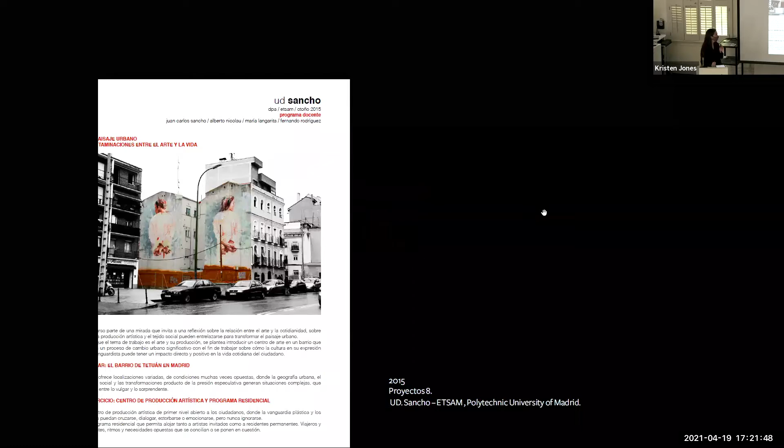That made me think that in my last year of design studio with Professor Sancho in Madrid, we had to do a project of mixed use of market, artistic production, and housing. As in many cases in the school, the surfaces were given, and we had to do the first approach of proposing different types of organization for the program. So I thought it was a great opportunity to think about my personal experience and different social schemes where I could see these three uses in different ways.

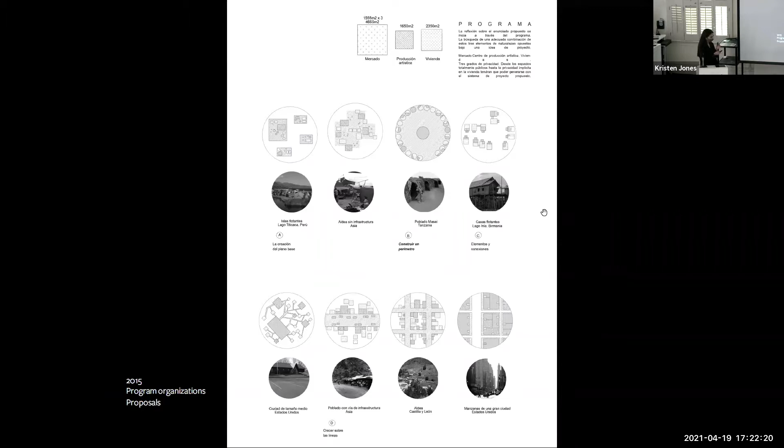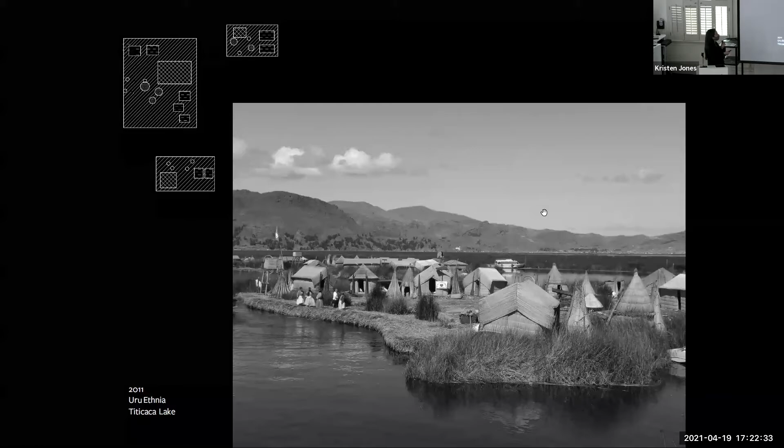I had in mind when I visited the Uru ethnia in the Titicaca Lake in Peru, and they have these schemes of floating islands where they can make different constructions. Or when I visited the Bosque Manos in Tanzania, and they have a longitudinal scheme where the main spaces for cultural events are on one side and the housing units on the other. And especially I had in mind the Maasai culture, for whom production is really important - they keep all the sheep and livestock in the middle of a circular scheme, leaving the perimeter for housing units to protect it. That is a really different approach.

So the next year, I had the chance to do my first research project called Habitat, spatial diagrams from primitive architecture, and it had 3 parts. The first one was learning about the principles, factors, and elements of primitive culture and architecture.

The second part was an analysis of different case studies. And the third was my reading, my transversal reading between all the case studies and different spatial composition thoughts that I had about it.

To make the selection of which communities I should study, I used main theorists like Amos Rapoport, Guidoni, or Paul Oliver, among others, to see which had more information. I could make sheets comparing the social factors, the spatial factors, the physical factors, and how the settlement and constructions were made at all scales.

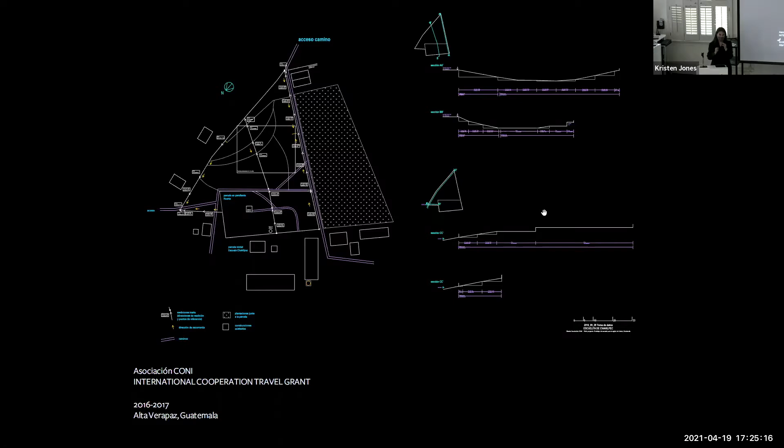So there are communities situated in Alta Verapaz, a department in the middle north of the country. It is divided by a high line of mountains, and has a social and economic condition that's really specific because they don't have many economic resources. It's a really poor area.

At the same time, 80% of the population are indigenous, they are Q'eqchi'. So these were the communities I was working with, and they have this Maya tradition really present, but at the same time you can clearly see the integration with elements taken from global culture.

So on my way back I proposed Nimakmu, and I wanted to focus on 2 things that were important to me. One was the way of living, which was agriculture. Their way of life is settled through the year by the crops.

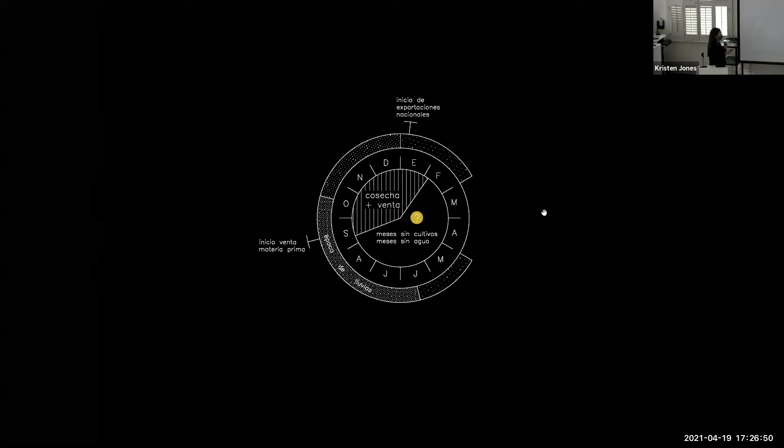Whenever they have to do all the work for the crops, they have work. And whenever there is no rain and no crops, it's a really tough time for them. The main crops are coffee and cardamom, that's what they sell to live.

The other problem that was quite important for me, because I come from Madrid so I was used to working in a dense city, is the dispersion present in indigenous communities, especially this one, where they say they don't have communal spaces to organize themselves. So these 2 points were really important for me.

I had in mind this work I had done about other communities, and I learned how the Piaroa, for example, make huge constructions. They also work in agriculture, but they have a really good way of organizing the community because they have these big spaces.

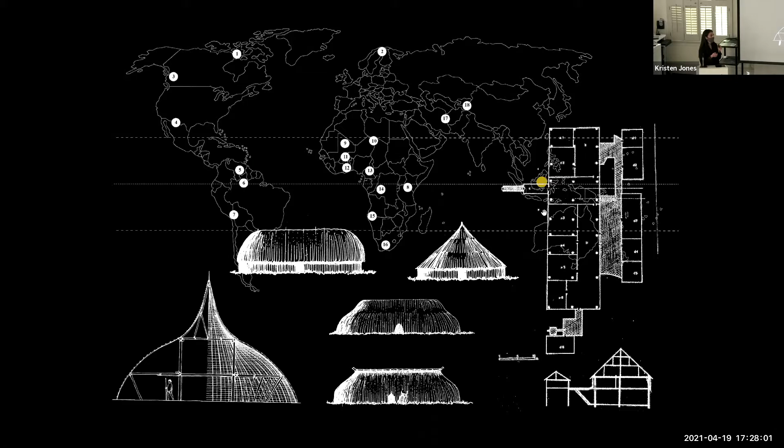Also the Indian people in the Amazon forest make the malocas, which is also a big construction, and they live and work in there. And especially the Dayaks in Borneo Island, whose name means like long house town.

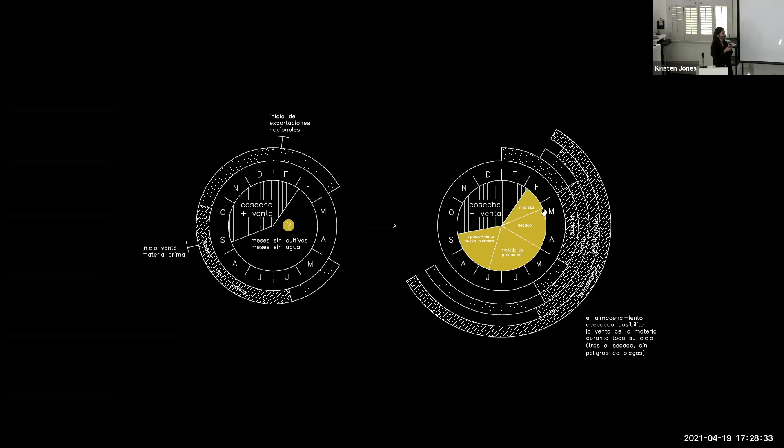Like a huge town, the whole town where they live and work and organize themselves. That's why I wanted to propose Nimakmu, a small factory so they can make their processes, but at the same time also a town hall or community center, trying to encourage them not only to reinforce their capacity as a community, but also to change the work they were doing, being able to work on their crops.

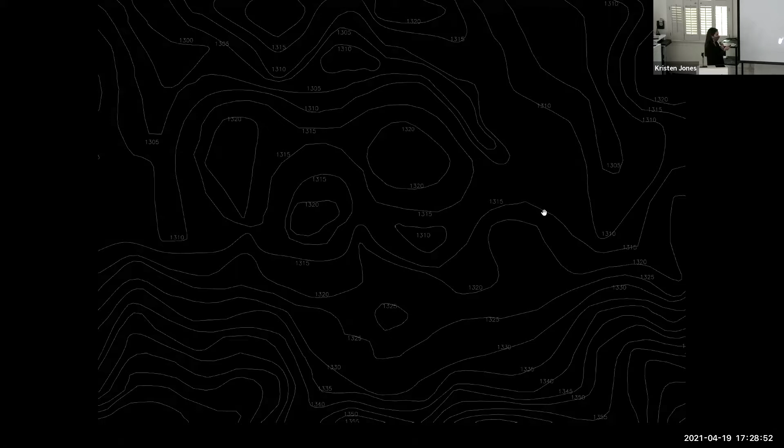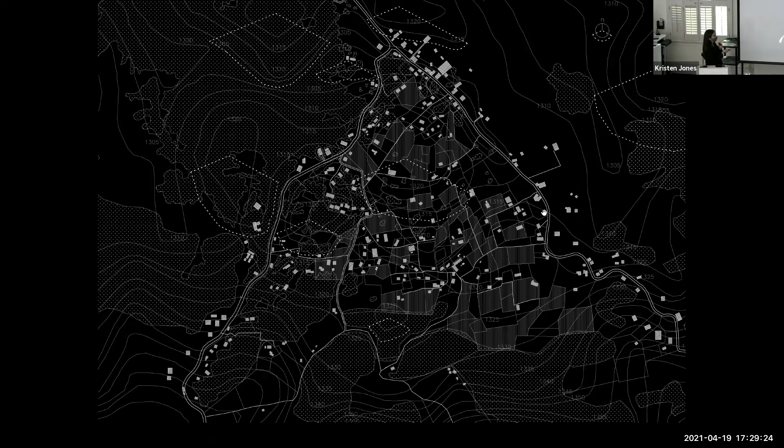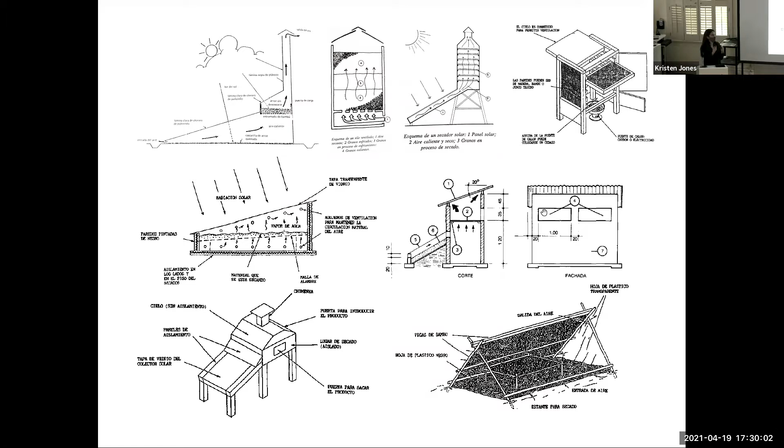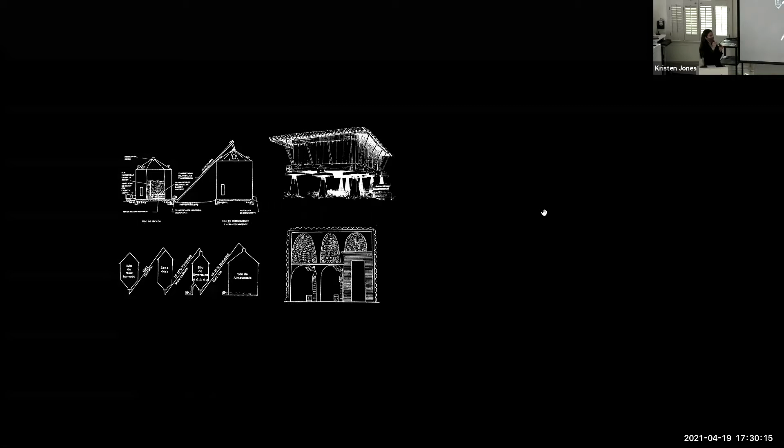It was also a great opportunity to learn architecture, not only from croquis or architectural books as we always do. I made several trips to the library of the agronomous school of engineering, close to the architecture school, trying to learn from the FAO systems of sustainable ways of working with coffee and cardamom without needing electricity or big industrial infrastructure. My conclusions were about how to move the crops through the processes, how to keep them in a dry space without touching the ground so they stay in good condition, how to integrate this solar system, and also the importance of outside spaces because of the weather.

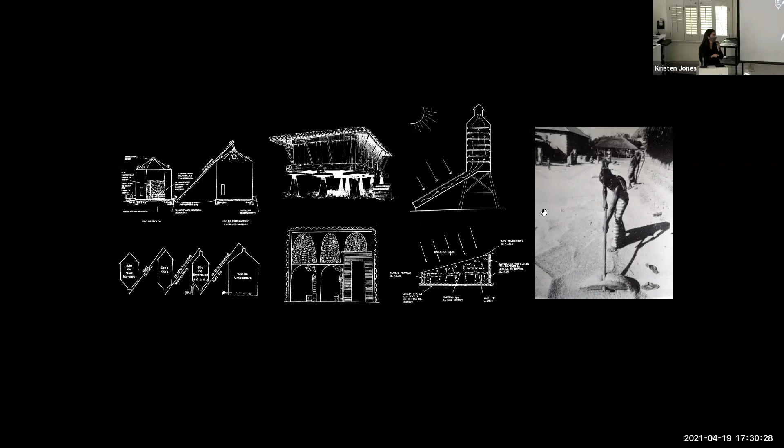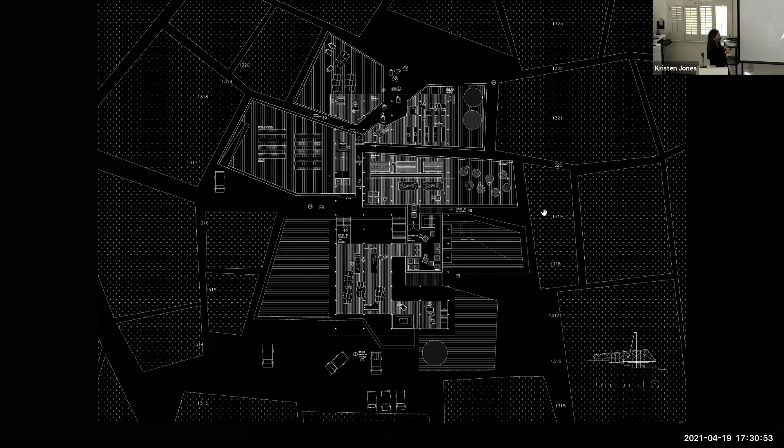So my starting point, as I said, was the placement, and I wanted to work with the crop pattern — also the placement, the way of situating the chimney, and trying to integrate one more roof as they do in the community, using the orthogonal pattern to arrive at this complex where they can work and live together. This other grid from the crops also allowed me to have spaces for arrival and some little plazas connected to the only road where cars can get into the community to transport the products.

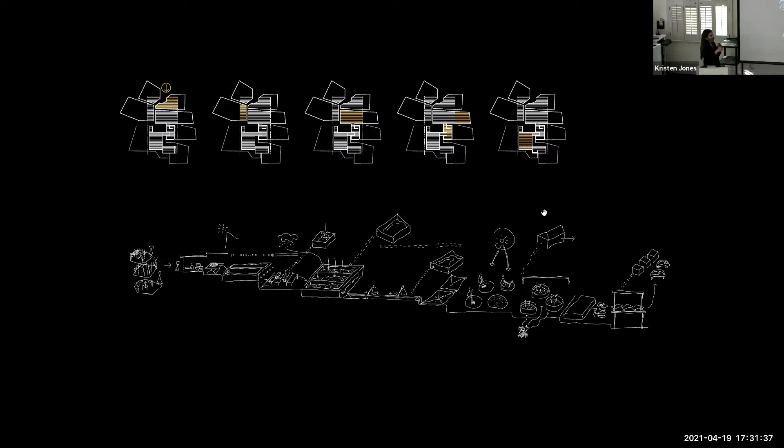The spaces were related to these processes: the arrival, the drop-off, the classification, the cleaning space, the dry space in the outside area, but also in the chimney and the upper levels where we could store the products without any problem. And then a final point to get the products out of the community.

In terms of how to build this complex, I had in mind the two materialities present in the architecture of the area — one that is really dense, but also the use of wood for really light skins. This is due to the influence earthquakes have had in the area, especially one in 1976 that was really dramatic, which caused all the solid, dense construction to change to reinforced systems or light systems with wood.

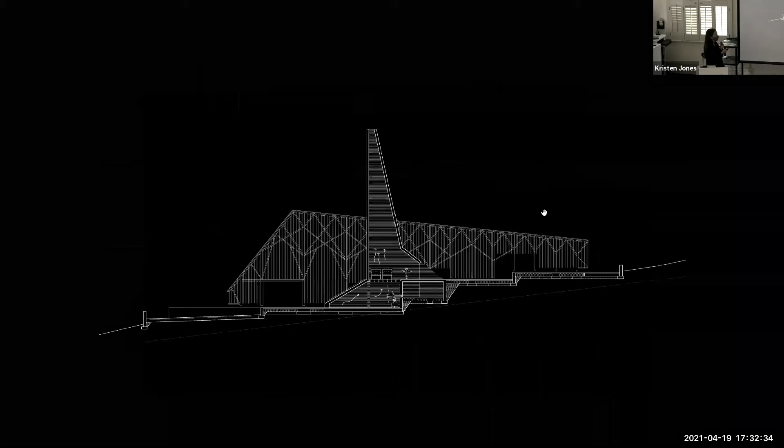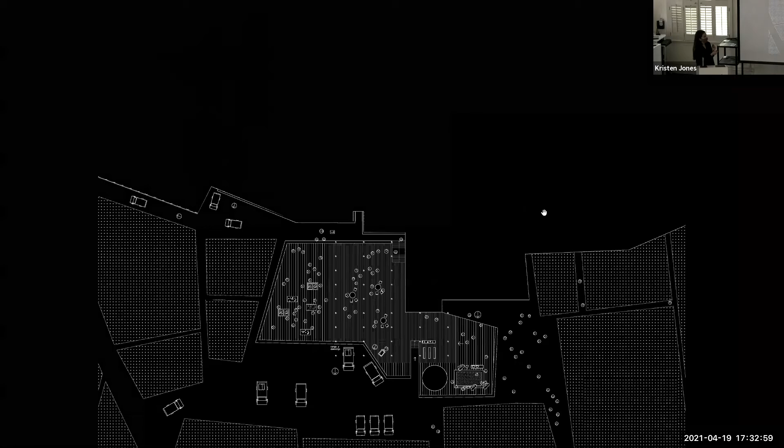So I tried to implement that in the project, especially in the ground and in the chimney, also using the chimney as an opportunity to use the slopes to take in heated air to dry the seeds, and also to move a little mill in the bottom for the corn tortillas, which are really important in the community, and can be used near the plaza at the bottom level.

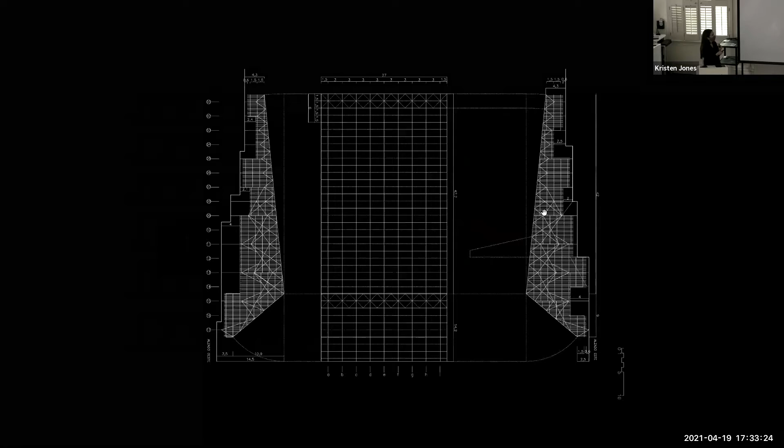With this system in the first level established, I wanted to work with the other system, the lighting system, because of the constructions in the community made with these little wood panels. Seeing their properties, I needed to design a modular system to solve all the facades and the different heights, from 3 meters up to 15 meters, that needed to be solved to arrive at this big roof.

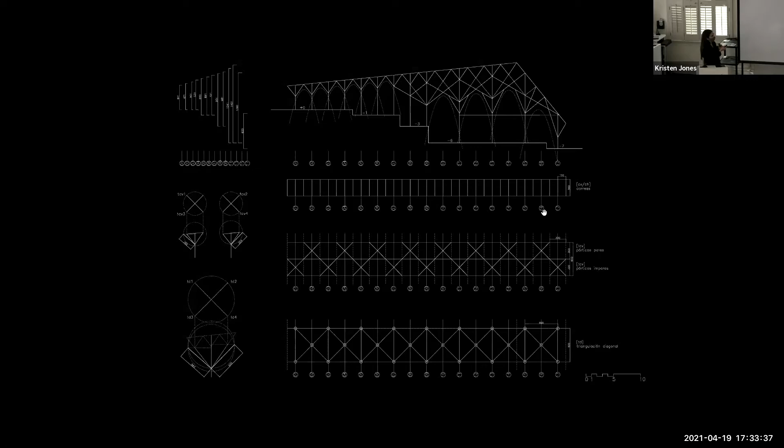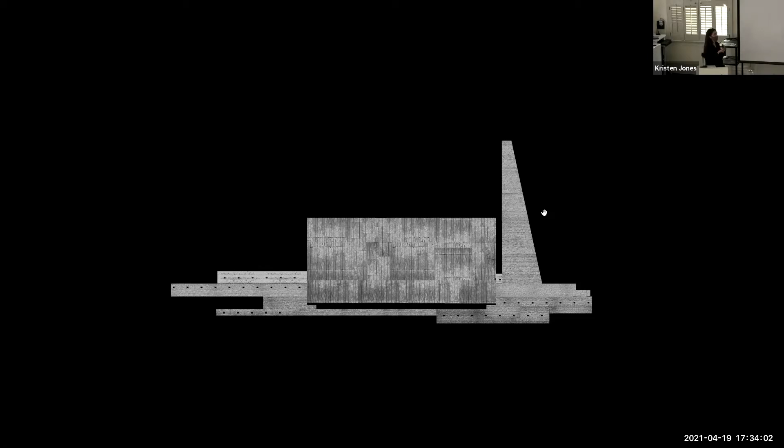That was a great moment to realize my interest was really linked to the cultural, the spatial, the architecture, but also to the productive quality of the communities. I saw that in many projects that were interesting to me, like SESC Pompéia by Lina Bo Bardi during my college years.

So whenever I started the PhD courses, I tried to focus on this spatial-productive condition that I had around me in Spain, seeing the difference between before and after industrialization. I did several small research projects, and the one most useful was the research around grain storage, the Red Nacional de Silos, which for Spanish people is an iconic thing we see on the roads all the time.

That's to understand the cultural present, but also linked to the productive system. As I said, it started in the 40s and was a whole system into the 90s. They were constructed all around the country, and now many of them have been taken out, or they are still there but without that use.

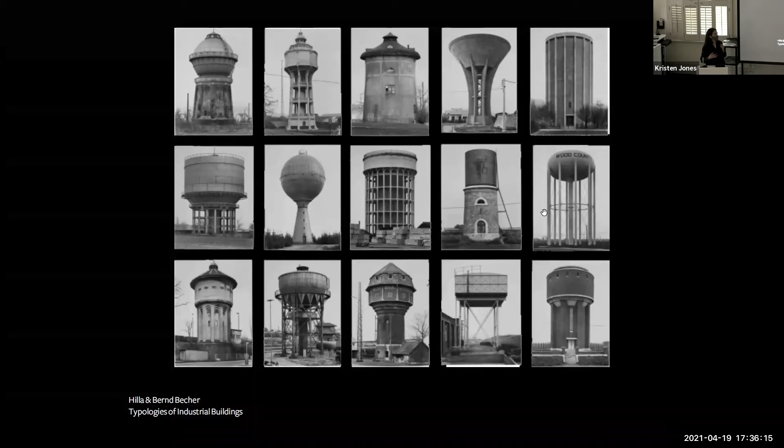I also had in mind the work of the Bechers, the typologies, and how industrial buildings have arrived to have this presence and this identity.

But it was completely the opposite of what I had lived in Guatemala, where I had this collection of pictures, but the school is the same, the house is the same, the bus stop, the grain storage. So they have no typology hierarchy.

And I wanted to keep working on that, trying to search for the little details of ordinary architecture in these communities. So that's when I proposed 'Tradition and Global Culture: the Local Architectures Associated to Production in Guatemala,' which is my PhD project.

Knowing that I'm not the first to look through and put my interest in ordinary architecture, I wanted to see what was my focus and point of view to approach this work — not thinking about vernacular static architecture or just contemporary architecture, but having a view of culture as a hybrid element, a community with many layers of years and cultures that have passed by.

So the influence I've seen isn't only whether they have a cell phone or how they think, but I think there's also an influence in the architecture, and that's what I'm trying to work with. For example, these are the stairs in Chichicastenango, one of the most important Mayan points where all the festivities occur.

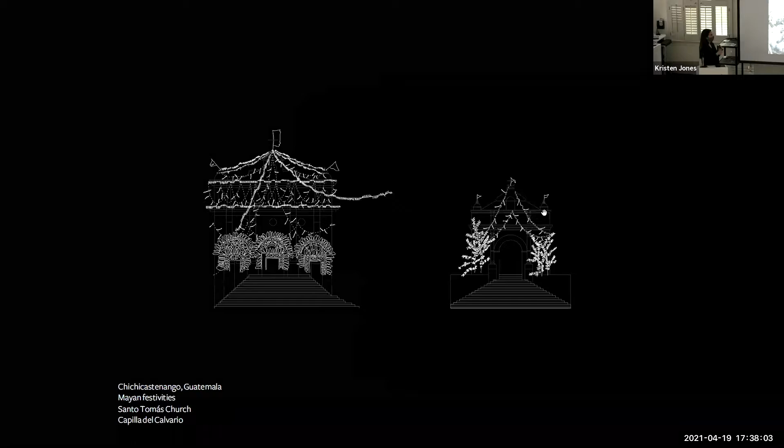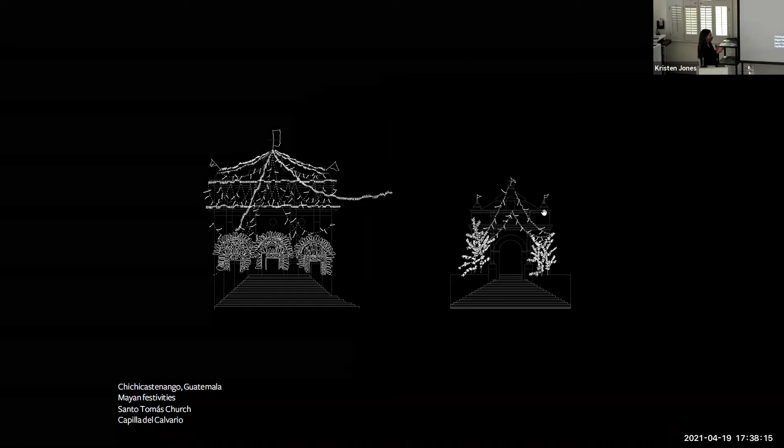They hold these big parties, and it's a huge place for the Mayan community. But the background of all that decoration is actually a Catholic church from 1545, which was settled on these steps — 18 steps from a Mayan temple. So there's this kind of layering in the models.

That's how I arrived at thinking that the 'model zero' I was seeing in the indigenous communities, in the words of Paul Oliver and others, is actually one model that has then had other models in between, and right now we can see many of them mixed together.

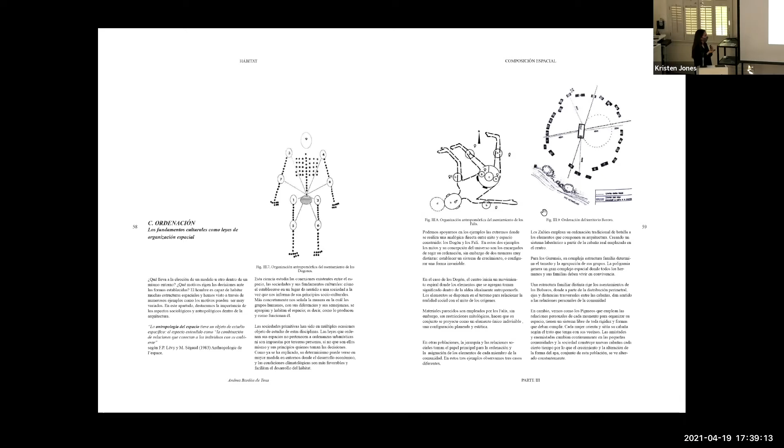And I guess there's a future hypothesis to think about how this is going to evolve with globalization taking place in these territories. So these cultural factors that I hadn't thought about a few years before are something to rethink.

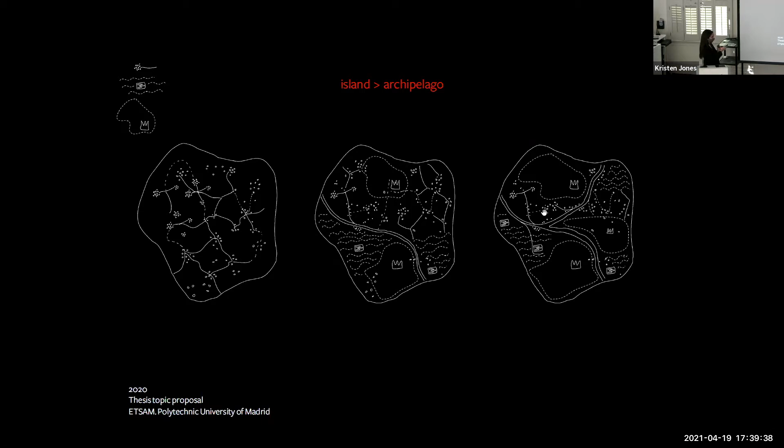The typologies I have to work with are not only the traditional ones, but also some that came from outside, or at the scale of construction analyzed through physical possibilities. Now they're integrating metal sheet, or even little objects I've seen, like bottles making stairs or roads, thinking about a second-hand construction with the elements they have.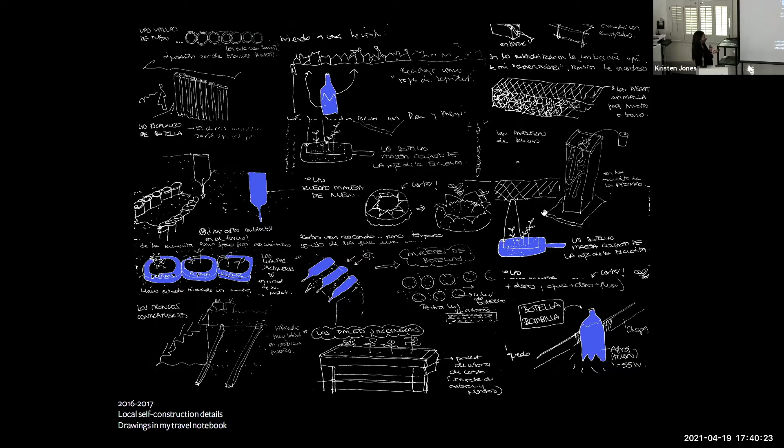That's my point of view on the second-hand construction I was seeing, which made me think it's not only one way of changing but a two-way process, as I saw in Brussels, where they were all the time trying to recycle materials, or in hippie communities going back to systems from indigenous communities, or even in the studio where I worked on furniture, trying the recycle trend, or for bigger projects integrating materials that seem really basic.

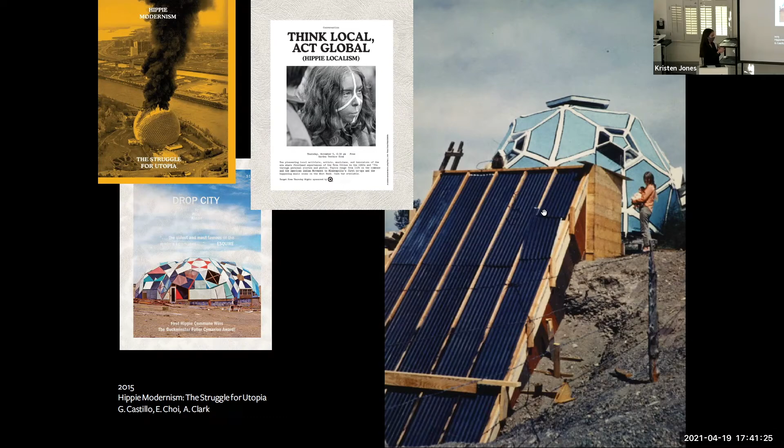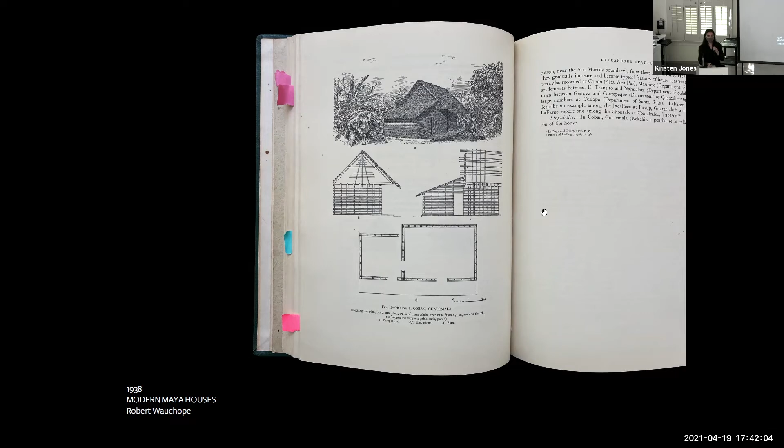That's what had happened years before, trying to have these two layers of technology but primitive schemes. Right now I find myself here in Tulane with this work in progress on my PhD, and it's been a great opportunity to find work like Robert Wauchope, who looked into the same communities I'm trying to work with, with photographs showing that back then they were still using solid soil, and the house was also the place of production. I think it's going to be a great experience to keep thinking about what the house is and how globalization can change these communities.

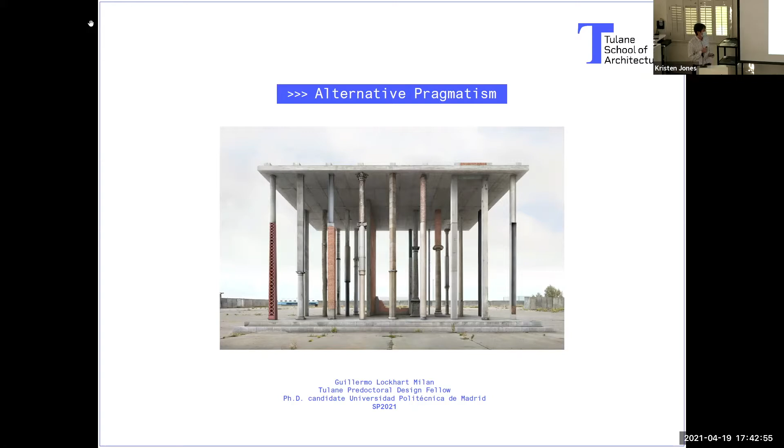I want to start by explaining very briefly the title of this lecture, called Alternative Pragmatism. You'll find that this combination of words, although I find them interesting, represents more a problem than a clear concept. I've chosen the word alternative, even though when someone says alternative, it begs the question: alternative to what? Something alternative could make others normative.

So I think that my work, my professional practice, and my research... you can talk now. Okay, it's working.

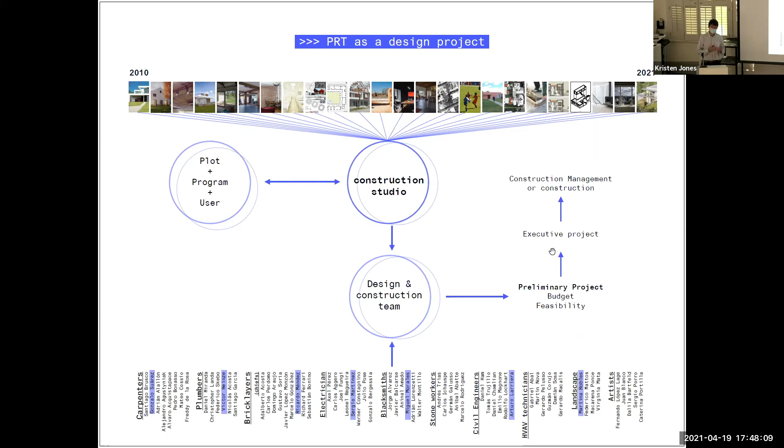So I started my professional practice by founding a merger between a traditional architectural firm and a small experimental construction company, what I call a construction studio. This construction studio created a design and construction team formed with carpenters, plumbers, electricians, civil engineers, landscape architects, and so on, who started working from the very beginning of each project with different construction systems and budgets in mind. So you'll see that in all my projects, from the very beginning, there's a focus on construction.

So this work system tends to focus on a close relationship to craftsmanship, and also the use of both natural and industrial materials. But it also led to a simplification of the architectural form. So we can see here different projects I've been working on, and you will see that a primary form is repeating in all of them.

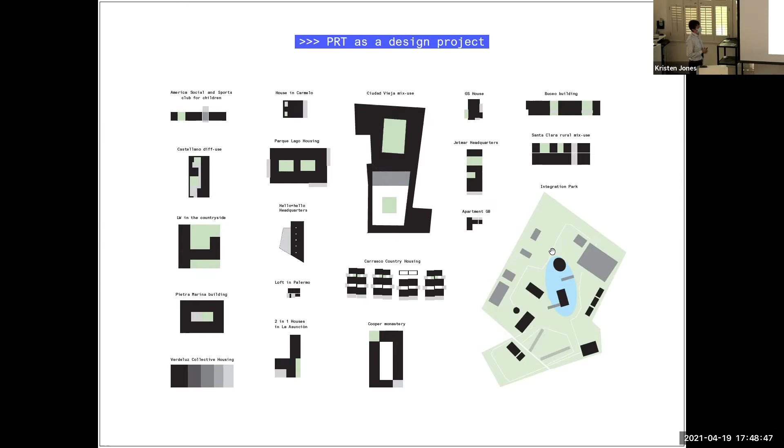So there have been a lot of social, cultural, and economic phenomena that have affected the home recently. For example, the decrease in the size of family, or the impossibility of access for young people to affordable housing.

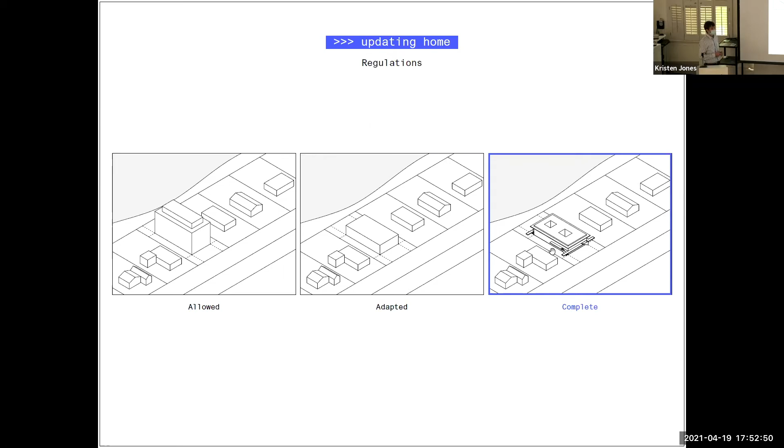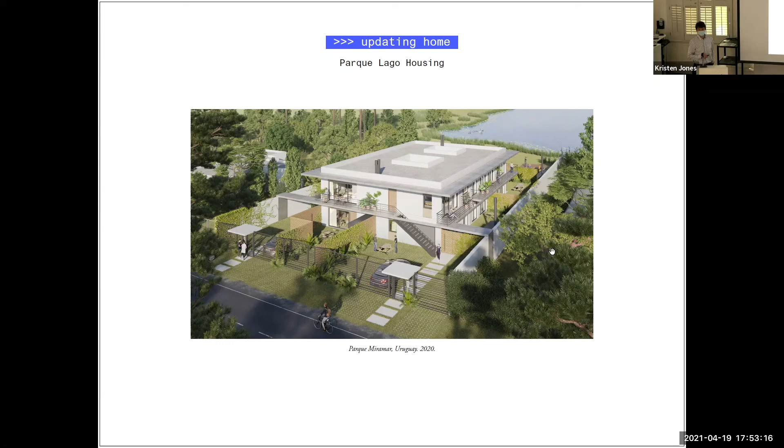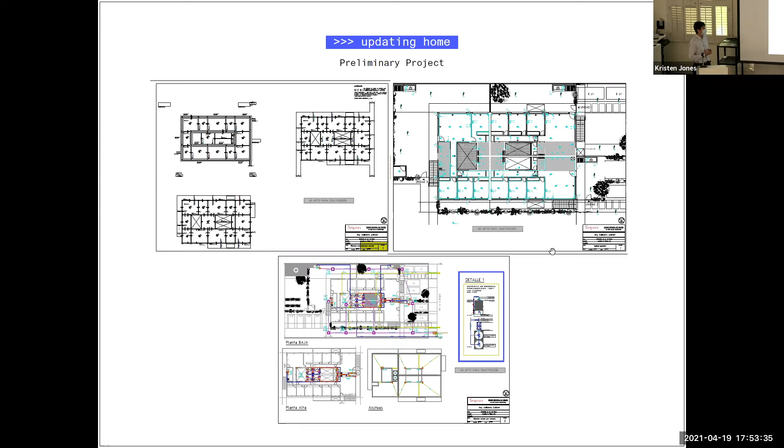As I was saying, I was telling you about this design and construction team from the preliminary stages. In this project, we drew these structural, sanitary, and electrical plans, even with some details, because we are already thinking about construction.

Also, this work system is related to our plan. The idea of the project, the main strategy, was to use non-hierarchical rooms that could be used for bedrooms, could be used for playrooms, could be used for study rooms, even bigger, really huge dressing rooms, for example. And the general scheme of the project would be the rooms, then a strip for circulation, and then a strip for wet areas. That would be the kitchen, bathrooms, laundry room, and they're all connected to an interior courtyard.

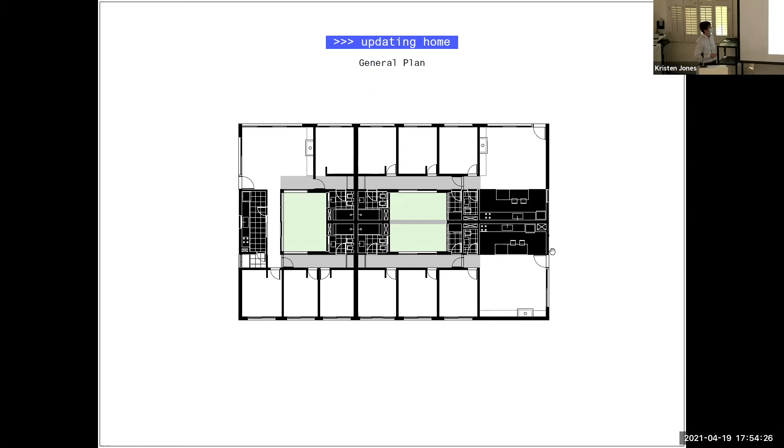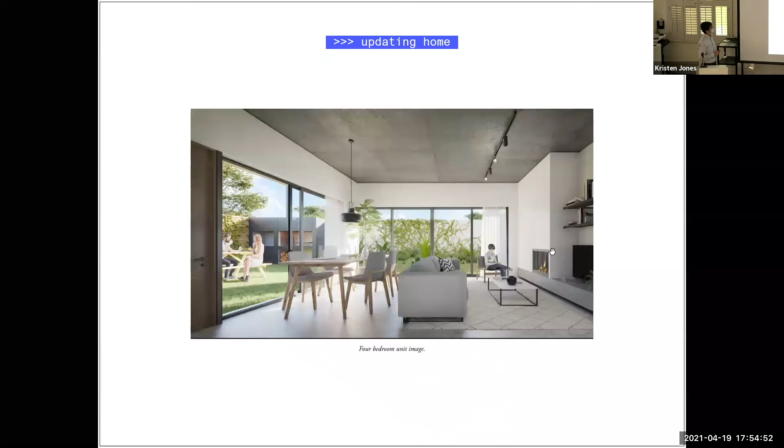Here are some images of the project that's ongoing.

The second aspect I was telling you about is the creative workspace. I think architecture is made by the relation between the architect and the users, pretty similar to what Roland Barthes states in his book, The Death of the Author, about the relationship between the author and the reader. As architects, we need to be aware of the creativity of the users, and we need to think that users can somehow change and add new meanings to the spaces we create.

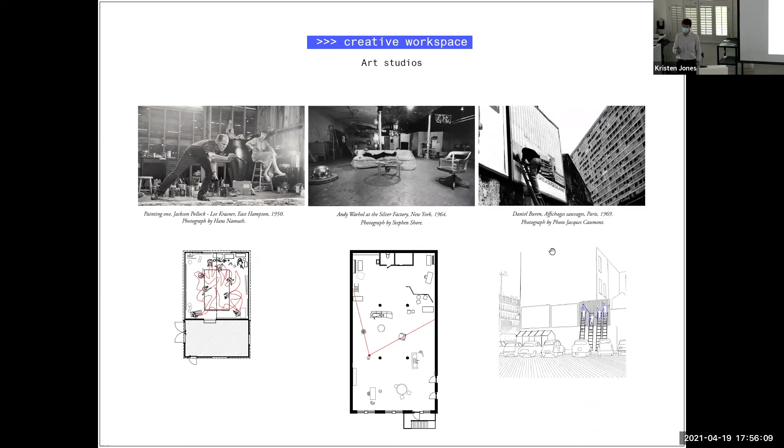That's why in my PhD I continued with this research, and I started studying art studios, mainly focusing on Krasner and Pollock's studio, barn studio in the Hamptons, the Silver Factory Loft by Andy Warhol in Manhattan, and the French artist Daniel Buren, who claims he doesn't have a studio, that his studio is in the street.

Through an exhaustive study of films, photographs, and other documentation, I came up with original plans for these studios, to find out what design strategies these artists were using to increase their creativity.

In this case, I'm showing the strategies I found in the Silver Factory between 1964 and 1968, design strategies used by Andy Warhol, but also by their assistant, Billy Linich.

All of these artworks were created during these four years. We have painting, sculpture, film, music, and so on, all within the frame of this specific space, and all within the frame of these design strategies: appropriation, reprogramming, the unfinished, the central void, artificial isotropy, and domesticated production and productive domesticity.

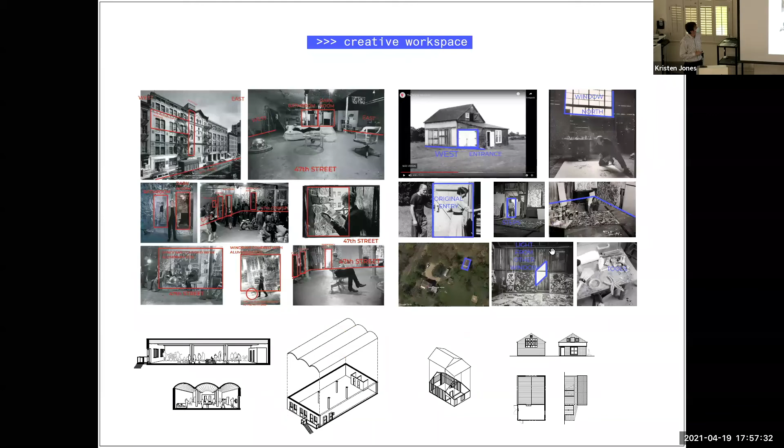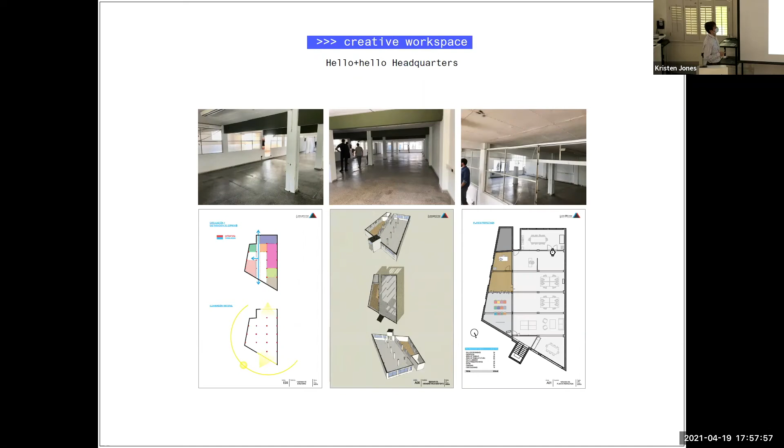These design strategies are, of course, meant to be used in real projects. This was the case when a really young company wanted to move their workspace and found an old industrial warehouse in the center of the city. The budget was really low, so the main strategy was to focus on the collective workspace, trying to have a non-hierarchical workspace while being careful about the relation between privacy and autonomy.

In that sense, we used two main tools. One was color; we used black and white, the colors the company used in their logo. And we also used really cheap compensated wood to link the space with domesticity.

This professional practice and research is represented in some publications, in books, and in different journals.

The third concept I wanted to present is social engagement, and I want to present this project called America Sport and Social Club for Children.

That was a project born from the necessity of relocating this club, which was illegally occupying public land, was very precarious, and also had problems with flooding. So we contacted a private company and local authorities, and we managed to move the club to a nearby park. It was a really important decision because the club was rooted in its neighborhood.

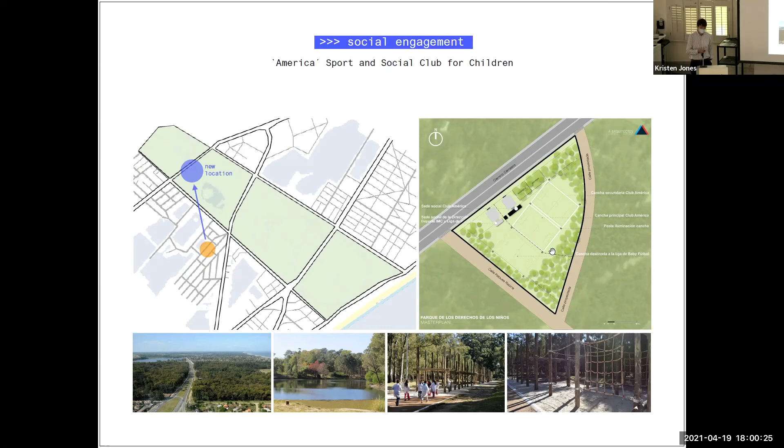There were more than 200 families related to the club, and children between 6 and 13 years old who were in pretty close contact with the club.

So we started a participatory process with different workshops with the help of a psychologist, and we went through different steps to try to listen and to use this concept I mentioned before, the creativity of the users.

This was all represented in a documentary that was aired on national TV.

As with the other projects before, we had a really low budget, and most of the money went to the construction of the fields, the soccer fields, which was the most important aspect of the project. So we needed to come up with a really inexpensive way of building the club.

We found these prefabricated panels usually used for cold meat chambers, and we could add some finishing on both sides. This was a really inexpensive, really fast, easy to transport panel system that made building this project really quick.

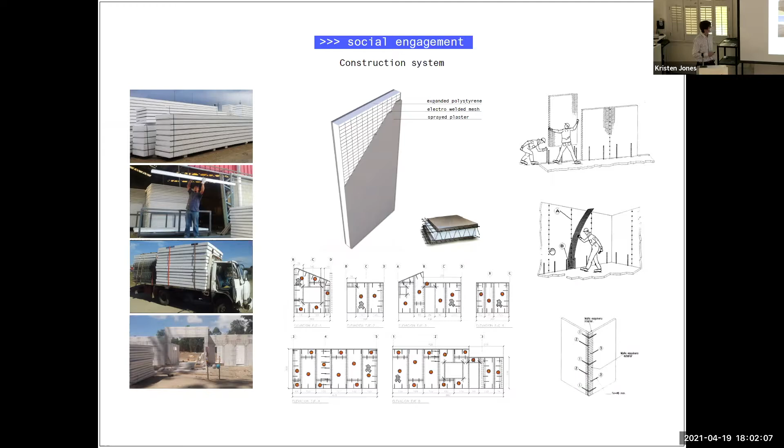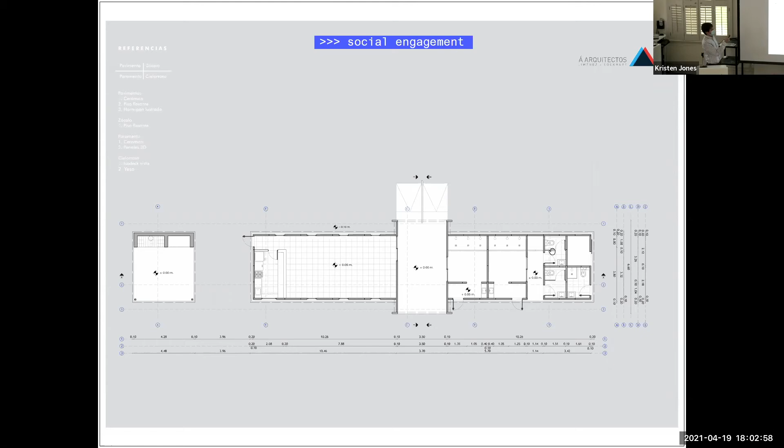The main idea, probably the only architectural idea we could use, was to have this open but covered space in the middle, trying to emulate the tunnels of professional soccer stadiums, and at the same time a covered space that could be used as an extension of the multi-purpose room.

So this was the final idea, the final image we presented to the children and the parents.

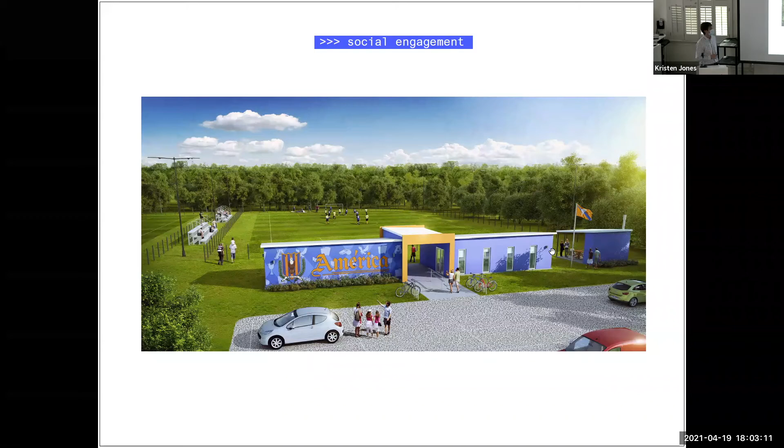During these workshops, during the participation process, we hired a visual designer to create with the children different signals, different ways of communicating, and for the children to feel identified with the club.

And this was the final inauguration. From the morning to tonight, there were more than 1,000 people enjoying how children play soccer. So it's very gratifying to see the identification and the involvement of all these families with the club.

As I was saying previously, the title Alternative Pragmatism in no way tries to define a way of working or a perimeter with which one should work. I think that creativity in architecture is trying to adapt to new surroundings and to create new frameworks. The surrounding context is the common place for people who have nothing in common. So let us devote our time to link our private ambitions with the public needs, doing and having a social responsibility through collaboration and through building only the essential.